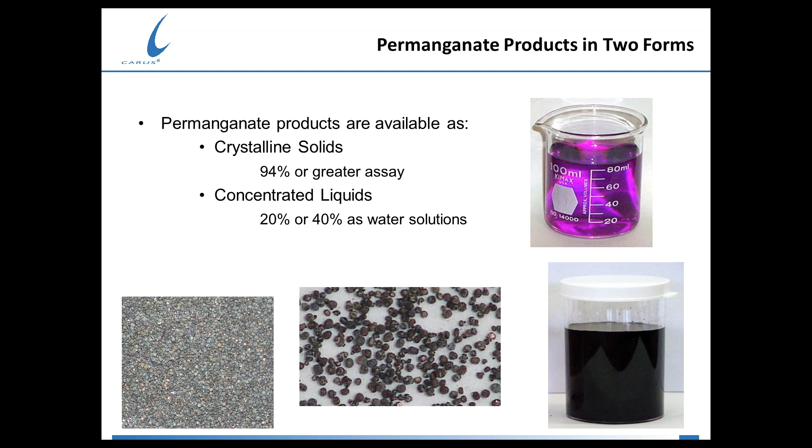For most of its history, permanganate has been manufactured as a convenient and stable crystalline powder. To use it, this dry material is dissolved in water, and a solution is made that can be applied directly into the treatment process. Since the late 1990s, we have also offered permanganate as a concentrated pre-mixed liquid, and in this form, permanganate chemistry is available for immediate use in an easy-to-use format.

Due to its unique chemistry, permanganate is recognized as an effective treatment for odor control. A compound's characteristic odor is often related to its structure and to different functional groups that are part of that structure. Permanganate oxidizes these functional groups, producing an odor-free product.

This includes those odors that are generated during wastewater collection and treatment. About 30 years ago, the wastewater industry discovered that by applying permanganate directly into collected wastewater or into wastewater biosolids, odors could be quickly eliminated. And although there are many unpleasant odorous compounds generated and released from wastewater, by far the most problematic is hydrogen sulfide.

Sulfide is undesirable for three primary reasons. It's toxic, and therefore a health and safety risk. It is odorous at very low levels, creating nuisance, fugitive odors, and worker and neighbor complaints. And it reacts to produce corrosive sulfuric acid that degrades infrastructure.

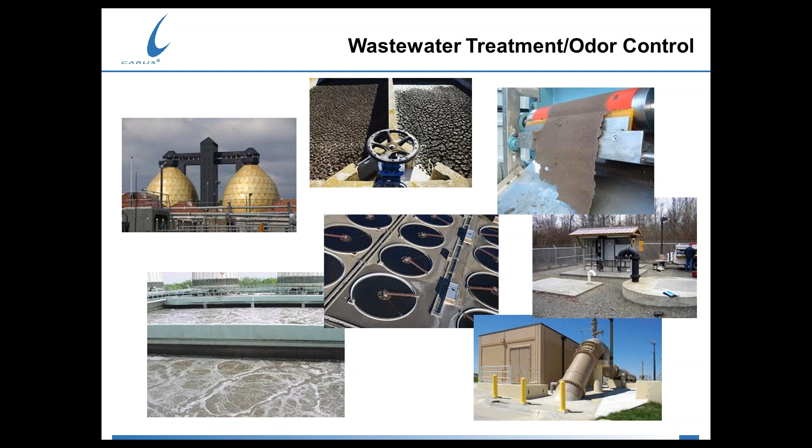So what are the physical chemical characteristics of hydrogen sulfide? Well, first of all, it's a colorless gas, so you can't see it, but it is detectable by nose at very, very low concentrations, typically as a rotten egg smell. It's caused by septic conditions during wastewater collection and treatment. It's produced by the biological reduction of sulfates in the water and the decomposition of organic material. And it can form virtually at any point within the wastewater treatment system.

Now, although sulfide is generated at many locations, let's focus just on collection systems today. All three of the adverse sulfide impacts I just listed are present in collection systems. And wastewater collection is really, arguably, one of the more critical elements in today's urban environment. It protects public health by removing sanitary waste. It enables productive economic activity, and it contributes to a high standard of living.

But because these systems are large, there can be certain problems. One is slow wastewater flows and long retention times contribute to anaerobic conditions, and these are the precursors to microbial-induced corrosion in sewer and wastewater treatment structures, and the precursor to odors.

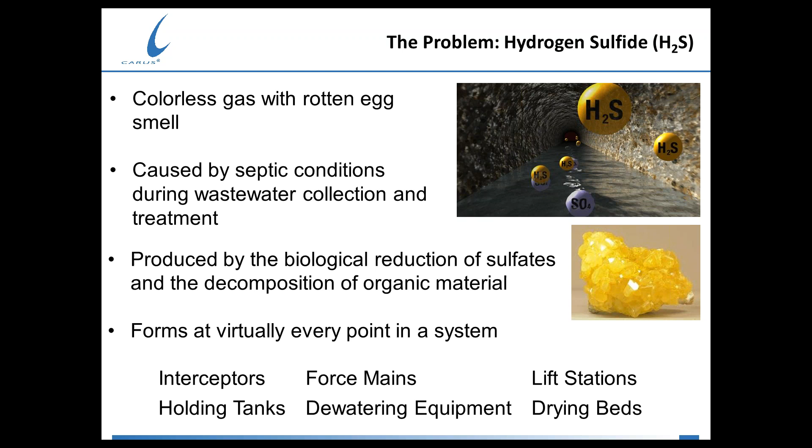I can tell you from different systems that we treat and visit, it is very simple for us to find H2S levels as high as 100 parts per million in a lot of buildings and rooms where we are visiting. Workers exposed to these conditions for 8 hours a day can suffer adverse health effects. At low concentrations, exposure to H2S has been linked to fatigue, headaches, eye irritation, sore throats, and other health problems.

Here are some examples of the corrosion to collection systems that many of you may be familiar with. On the left, we have a transmission line which has become so thin that during excavation, the worker's shovel went right through this particular piece of pipe. And on the right, a typical situation with concrete corrosion in a manhole, rendering those ladder rungs virtually unusable at this point.

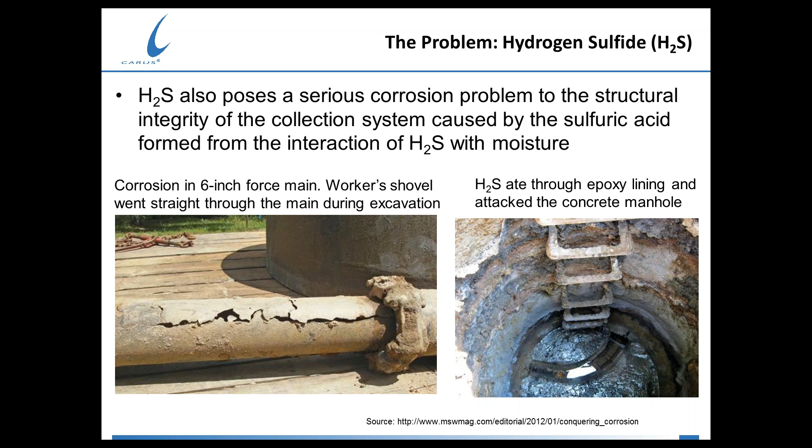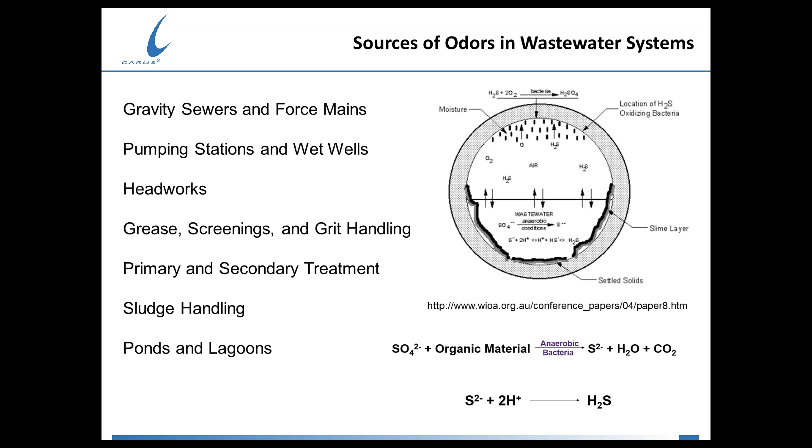Now we know that odors are released at many points in the system, usually at points of turbulence. By injecting permanganate into wastewater upstream of those odor points, the problem can be eliminated. Importantly, with permanganate, you do not need much reaction time. Permanganate destroys hydrogen sulfide in a matter of seconds.

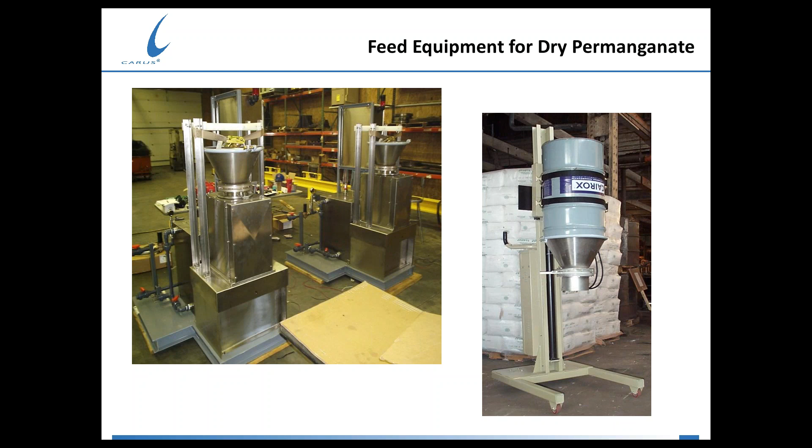So how do you dose permanganate into collected wastewater? For potassium permanganate crystalline material, you use dry chemical feeders and drum handling equipment. In larger systems, you may use a Cycle Bin, feeder, and dissolver system.

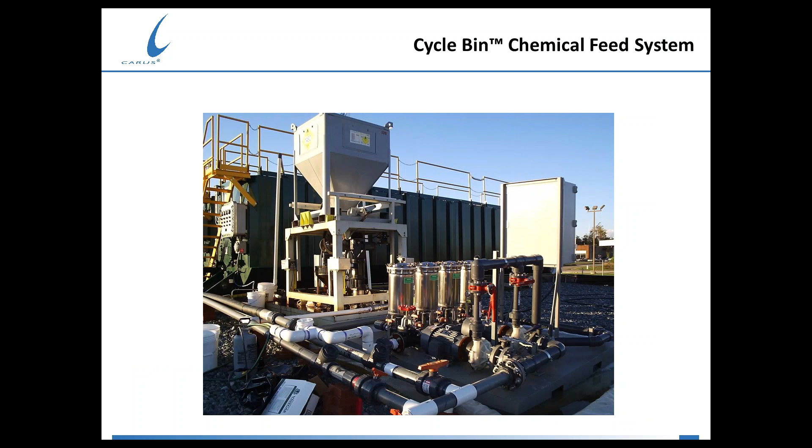And at some sites, potassium permanganate is mixed in a predetermined amount of water, and it is used to prepare a stock solution. This solution is then dosed into the water using metering pumps. You can see that these feed systems can be large, taking up a large footprint, and in fact, they should be housed in a building protected from the weather.

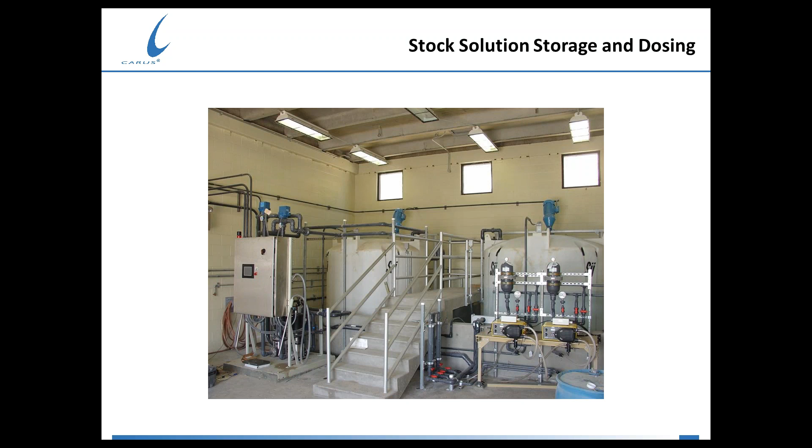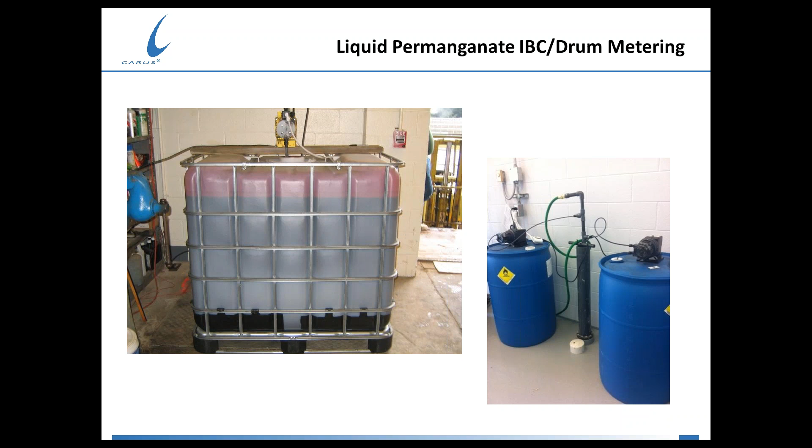If you're using concentrated CARUSOL liquid permanganate, the feed system may be smaller and easier to use, in many cases just requiring a metering pump. But again, preferably, it should be housed in some type of shelter.

At a master pump station, such as the one shown here, a building is often available. In this case, a chemical feed room and a buried chemical feed line were already designed into the system at the start, so it was easy to install a CARUSOL liquid permanganate feed system.

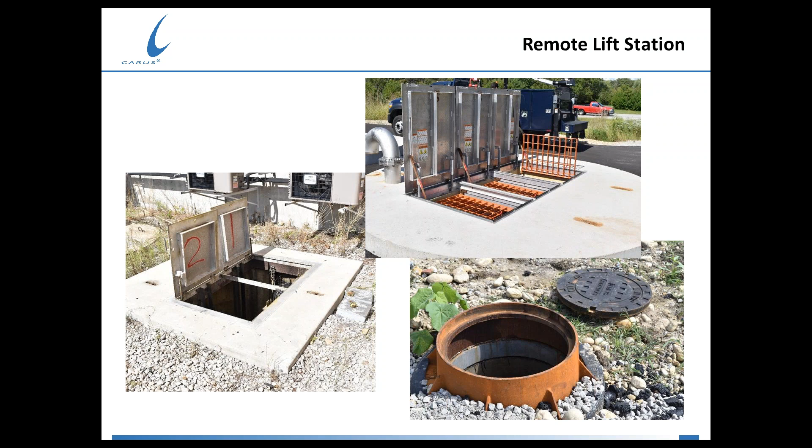But what do you do if you have a situation like this? A remote location with often no electrical power, no water supply for chemical mixing or dilution, no shelter, and no security.

Or in this type of situation where you have a large lagoon or evaporation pond or catch basin, and in this case access to all of the water in the large body of water is difficult.

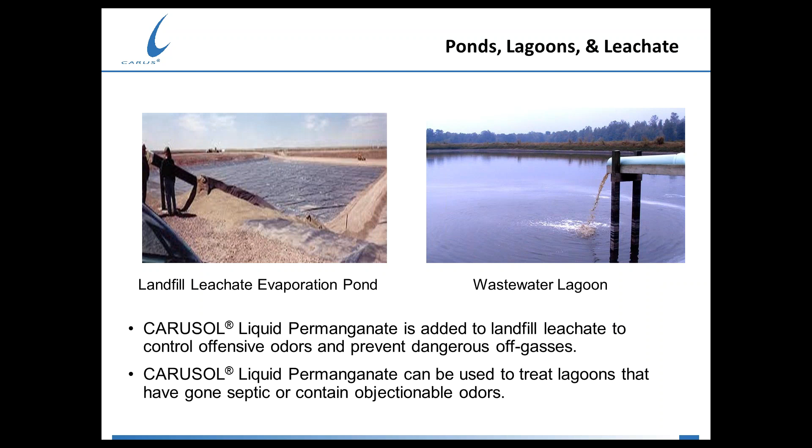Well, we've worked to come up with a practical solution for these particular problems, and the solution is our CAIROX CR potassium permanganate tablets.

The CR, which is controlled release technology, is fast to react with hydrogen sulfide and other odor producing compounds. It makes an excellent choice when retention times are short. These tablets are a passive system, safe and easy to use, and the treatment is typically deployed in a polyester mesh bag for rapid oxidation of hydrogen sulfide in wastewater lift stations or gravity interceptors.

The tablets are designed to be easy to use, and they can provide sulfide control for many days before new tablets are needed. The tablets contain about 80% permanganate that is combined with non-hazardous binders that facilitate sustained and controlled release.

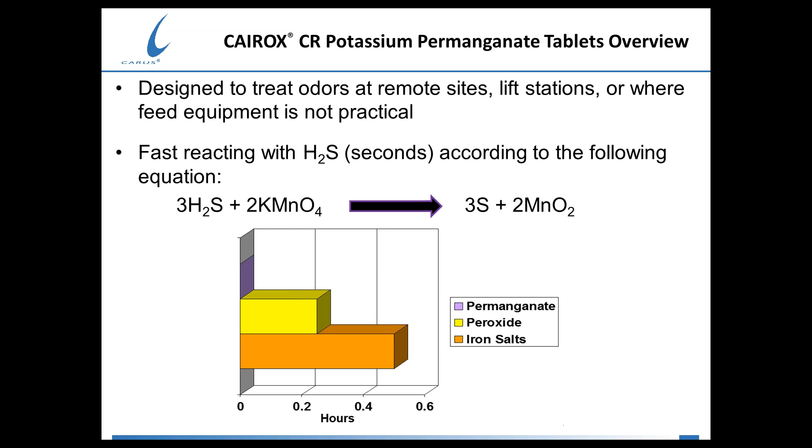For these tests, the tablets were placed into the reactor and the mixer was turned on, and it was a paddle mixer in this case. So we had some low flow, some low turbulence in the system.

The permanganate concentrations in solution were measured each day to understand how much was being released. And for each case, the test conditions were kept identical.

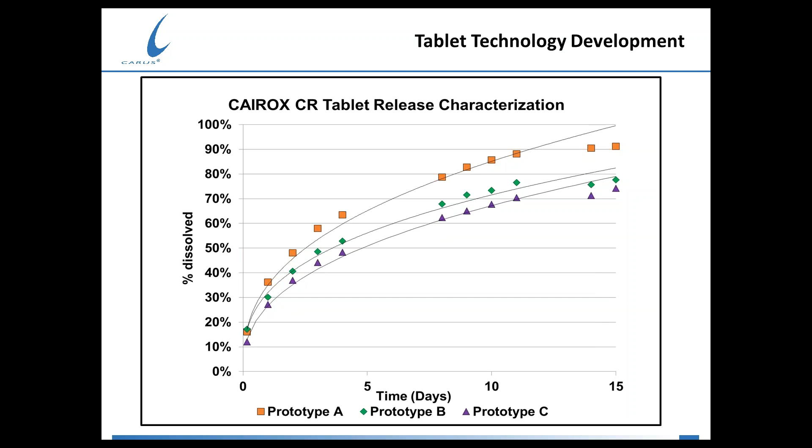We found that by increasing the permanganate mass loading in the tablet, the percentage of permanganate that was released increased, as expected. You can also see from this graph that the release is slightly faster in the initial days and then slows to a more consistent release as time passes.

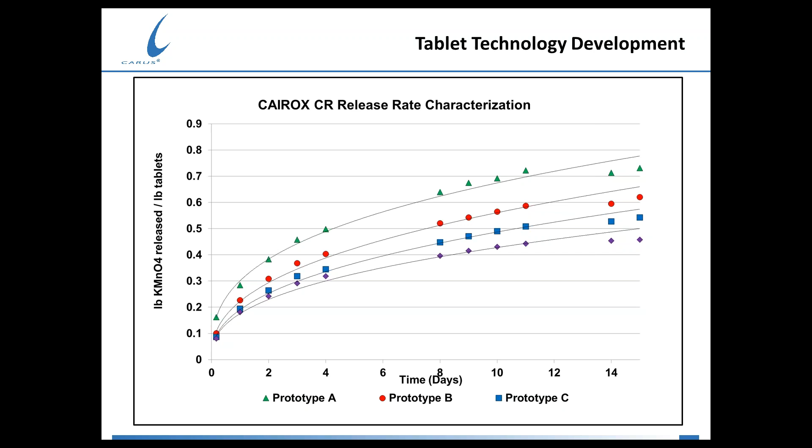That previous slide showed the percent that was dissolved into the liquid. This shows that same data in terms of pounds of permanganate released per pound of tablet, and you can see that it follows the same general characteristic as the previous slide. As we increased the mass of permanganate in the tablet, we did release more permanganate into the system.

Now here's some data that I just received recently from an actual field trial in New England. The system was a leachate flow coming from a landfill site, and there were a significant amount of sulfides present in this leachate, running somewhere between 2 and 3 milligrams per liter as dissolved sulfide.

The flow was relatively consistent at 250,000 gallons a day, although it was variable at times, between a low of 140,000 to a high of 340,000 gallons per day.

Now, at one site with one bag, there was not a significant enough permanganate to get good control. So in this particular case, 2 bags were used at 2 different sites, one downstream of the other. In Site 1, there were 20 pounds of tablets that were placed in the bag, and in Site 2, approximately 15 pounds were placed in the bag.

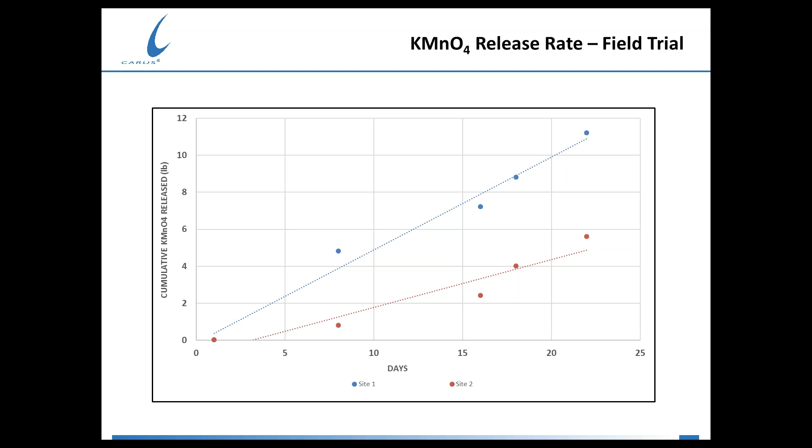Now the next few slides are focused on several tablet trials that were run in late 2015 as well as through 2016. They were conducted at a Midwestern collection system, and the typical daily flows at this system were 3 million gallons per day. They were receiving neighborhood complaints about strong H2S odors coming from gravity interceptors.

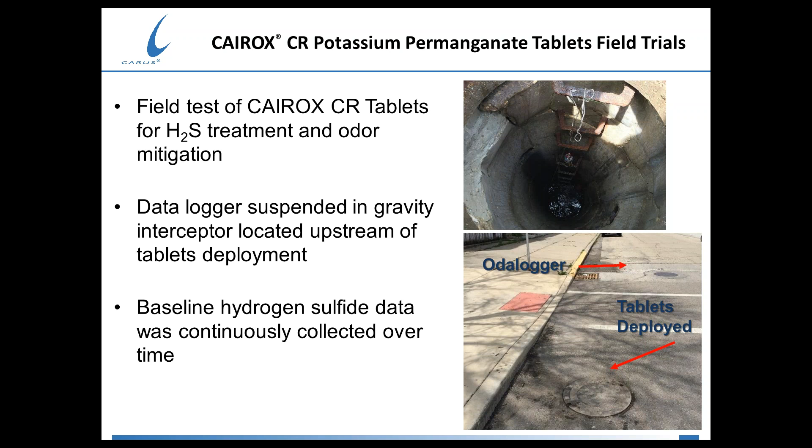10 pounds of CAIROX CR tablets were placed in the mesh bag and lowered approximately 6 inches below the water level in the interceptor. Several times a week the bag was weighed and then replenished with new tablets if needed. In addition, we continuously collected H2S data and the amount of rain that fell during the test period.

Because H2S has a very low odor threshold, its odor can be detected below 1 ppm. The average treated atmospheric H2S concentration was 0.2 ppm throughout the monitoring period, with a major odor release occurring between 2 p.m. in the afternoon and 9 p.m. at night.

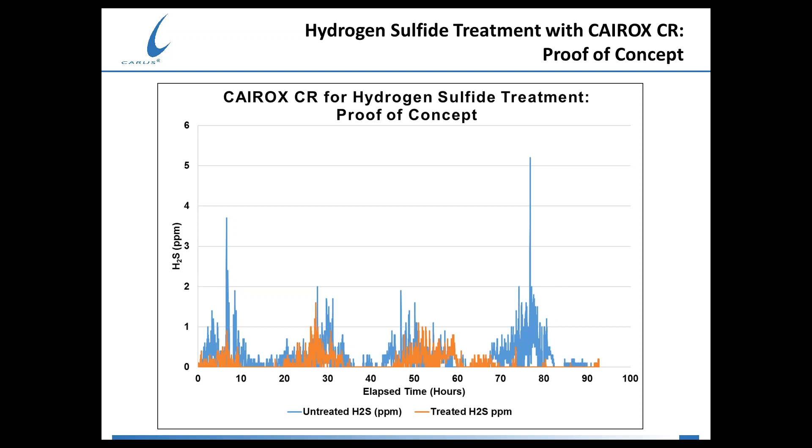The H2S removal results showed H2S removal at lift stations and also slow removal of any accumulation of fats, oils, and greases.

We ran this trial for a little over 2.5 months. We initially put 10 pounds of tablets in the mesh bag and placed them down in the manhole and continuously collected hydrogen sulfide data up gradient with the Odalogger. Each week we retrieved the bag and weighed it so that we could record the tablet mass loss over time. We also reloaded the bag with new tablets, generally 10 or 12 pounds each time.

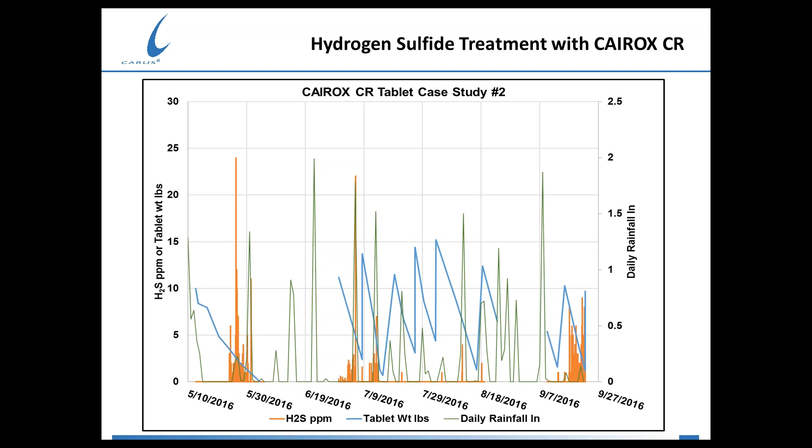However, as I mentioned earlier, if there's no flow or rain, the tablets will not be releasing permanganate, which is especially helpful at remote locations where access is restricted.

Let me summarize what we covered in the presentation today. First, the CR tablets provide effective odor control in remote locations where electricity and water supplies may not be available. By eliminating sulfide, you can prevent corrosion in the system. It's a passive treatment and simple to feed. It's long-lasting, so it requires less manpower, and by eliminating hydrogen sulfide, we can eliminate health risks and improve the health and safety profile of the system.